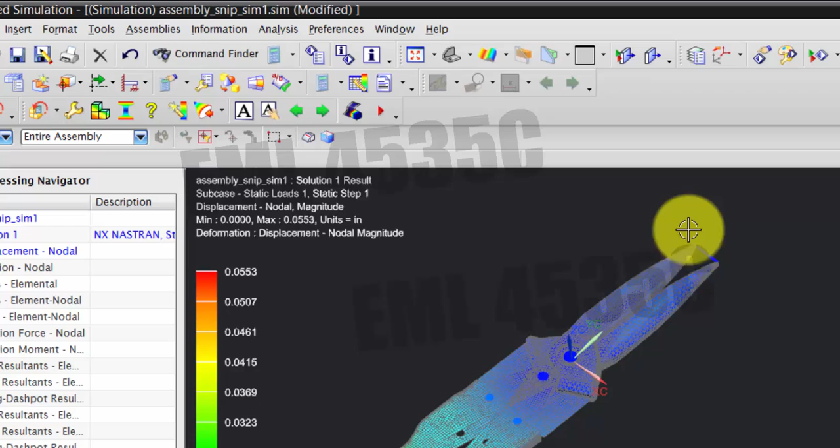Okay, so in this lab we're gonna change the material of the bar, and we're going to add a new coordinate system. That'll be lab 5 and a new coordinate system, and we're going to change the whole model into the new system as well as the bushings.

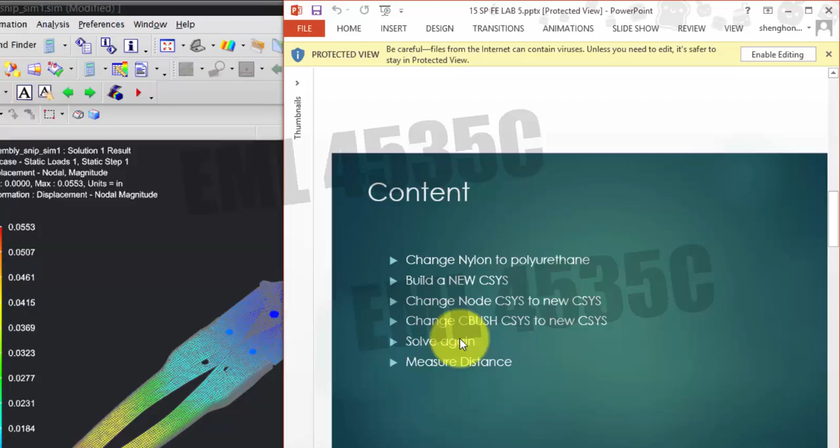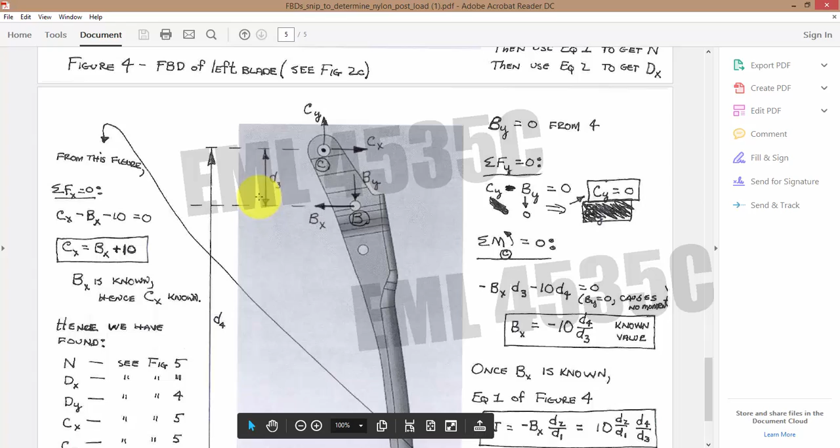Then we have to solve it again to refresh the results. Then at last we're going to show you how to measure the distance for the hand calculation, which is this. As you can see, we have 4 distances we have to measure for the hand calculation.

Alright, so let's go back to NX. I have the model from lab 4 on the screen. Then let's go to the FEM.

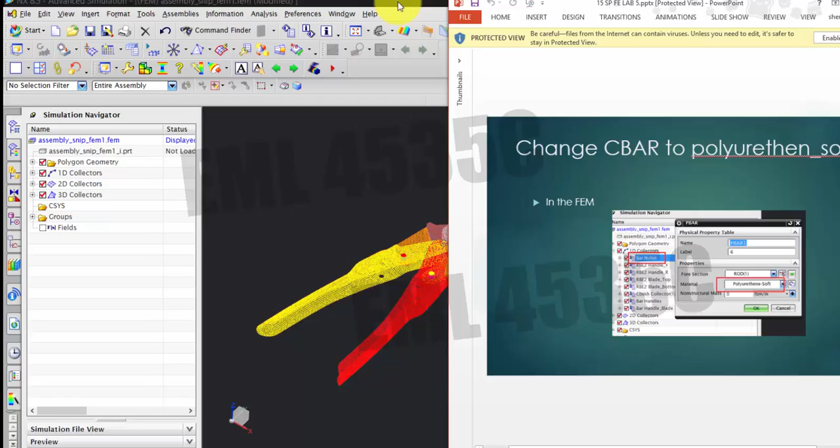So the first step is to change the material, and at this point you should be pretty familiar with that. Just find the nylon bar and double click the monkey wrench. It's not in here, so just choose from the material, and that'll be polyurethane soft.

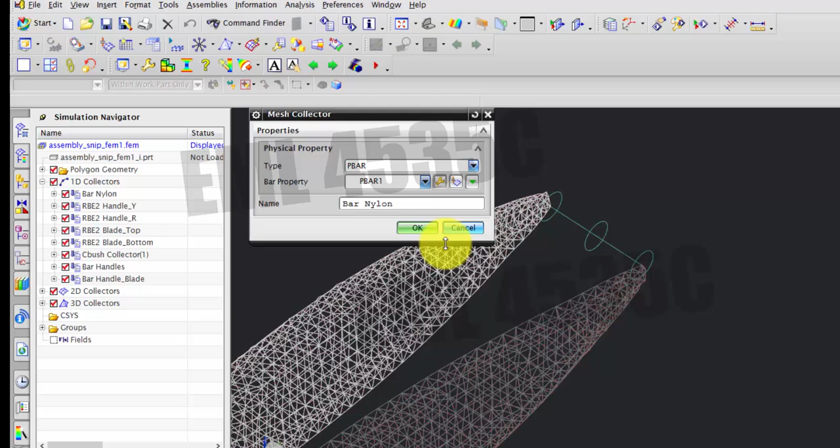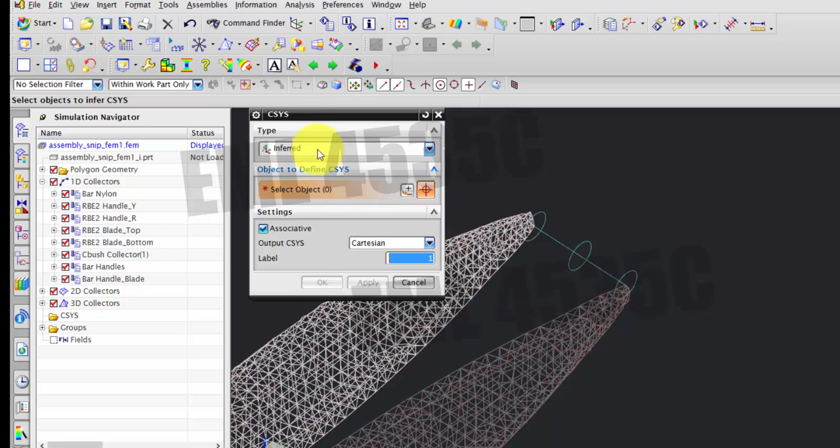Alright, next step, I'm going to change the whole model into a new coordinate system. To insert a new coordinate system, go to Insert, in Model Preparation, it's called Coordinate System. For the new coordinate system, we want the z-axis to be the same as this one. Let's see if we can turn on the old one. Z stays the same. The only thing that changes is, well, a couple of things change.

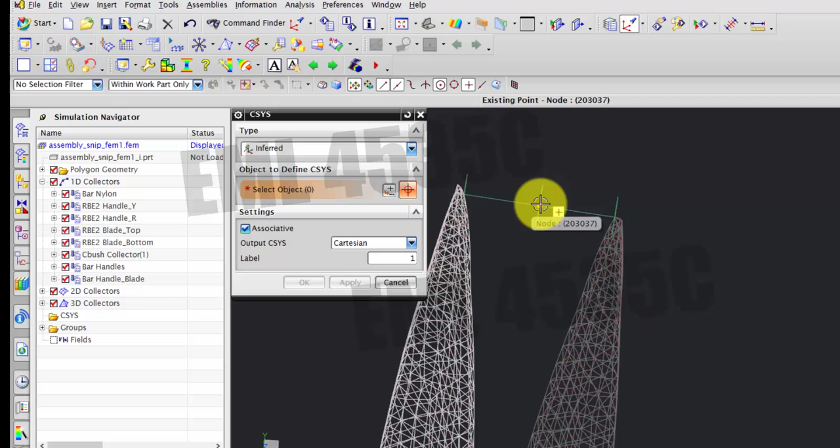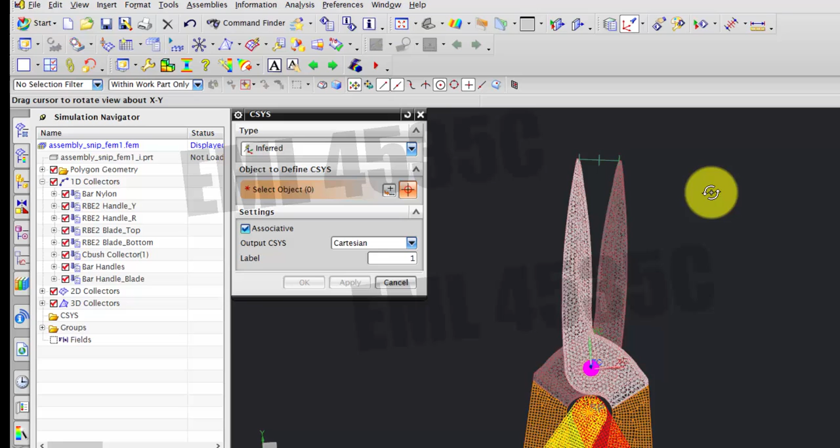The origin we'll put in here. The y-axis will be perpendicular to the C bar here. This way, the model is relatively symmetric in terms of the handle and those two pieces. The blade itself is not very symmetric. So that'll give us the x-axis along the C bar.

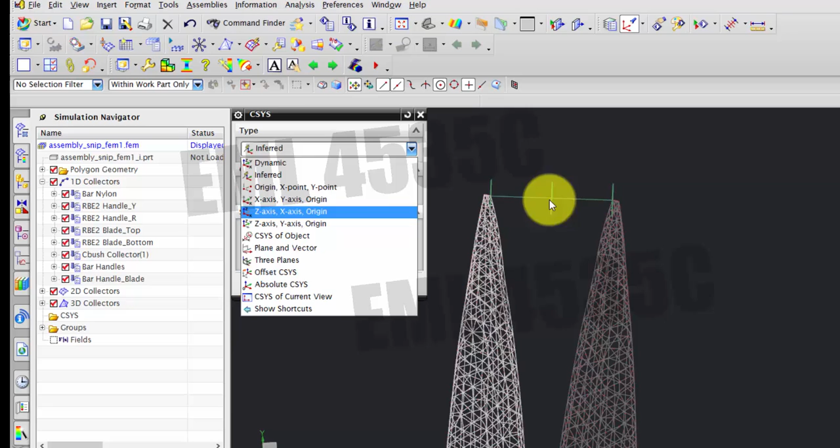Alright, so that brings us the method to insert the coordinate system. So z we know, and we know the origin as well as the x-axis. The y-axis is sort of hard to pick. So z-axis, x-axis, and origin. Alright, so the origin point is in the middle here.

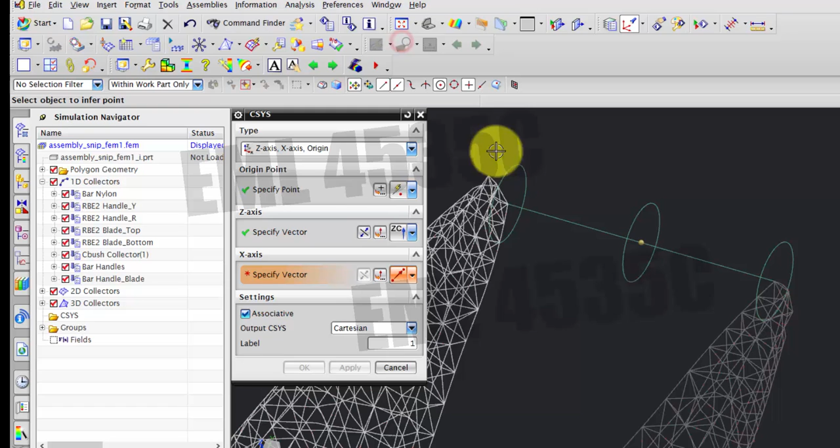Z-axis, you can either pick from this menu, or you can pick the coordinate system you just saw. And the x-axis is along the bar, so you would like to use 2 points to define the vector from this point to the end point. That'll give you a preview of the new coordinate system. This one looks good, let's just say OK.

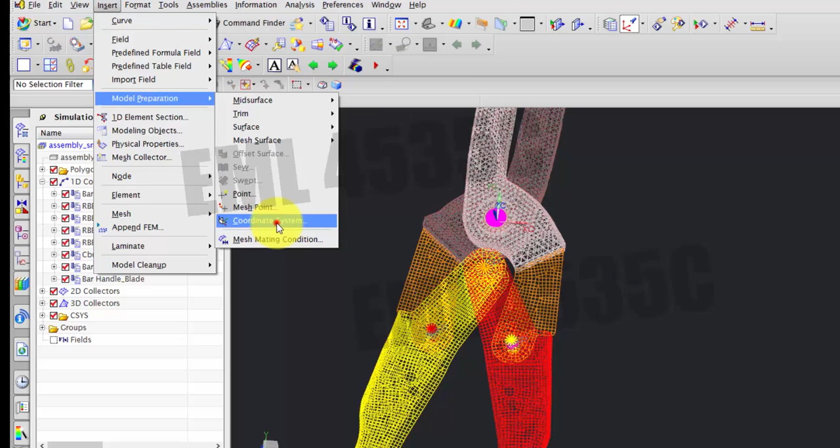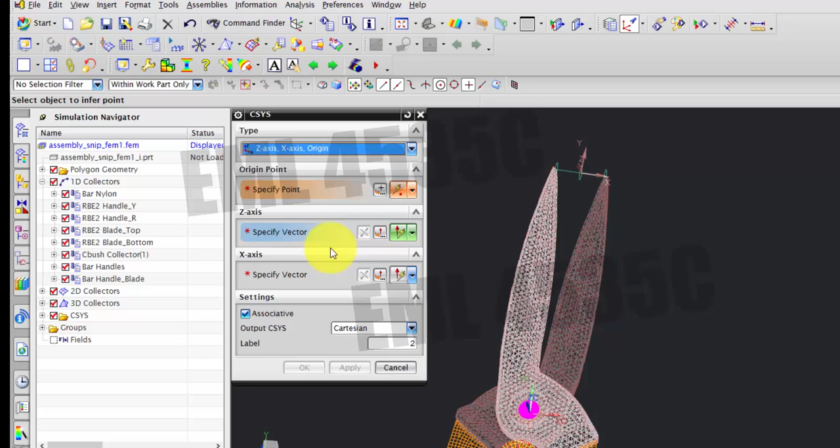Sometimes, not always, you might encounter one problem: when you insert a coordinate system with 3 objects, and as you can see, my z is already selected. If you pick a point, just doing random things, and pick another vector, because z is already selected when you open the command, you can't click OK even though you have 3 objects selected. So just beware, if you encounter this problem, just refresh it, change it so nothing is selected with 3 objects, then pick them. Let's try this, then you will have your OK button come back. Alright, that's just a little bit of troubleshooting.

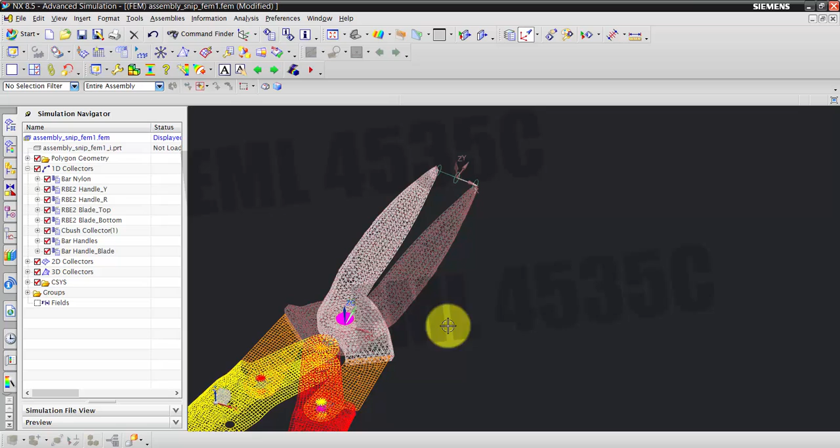Alright, so we have the new coordinate system. The next step is to change the model into the new coordinate system. And when we say change the model to a new coordinate system, we are actually changing the coordinate system for the nodes, because the whole FEM model is based on the nodes.

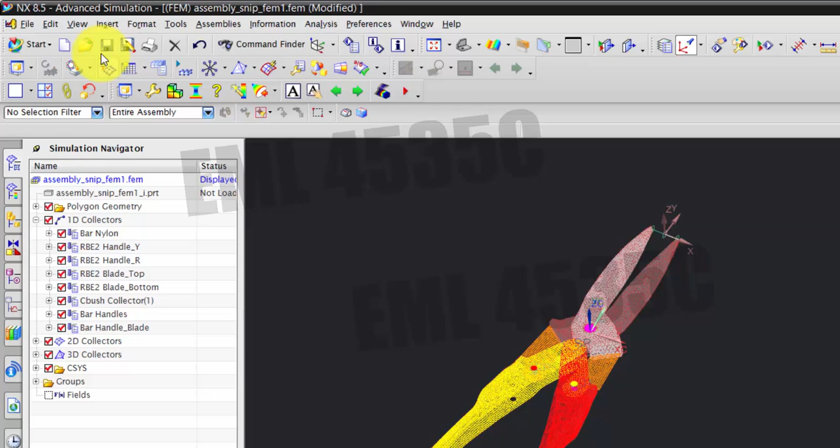So what we do here is go to Edit, and we're going to modify the coordinate system for the nodes and assign them a nodal coordinate system. The term is called displacement coordinate system, and the object is all the nodes. So before I select, I want to make sure all the nodes are on the screen by hiding and showing the meshes again.

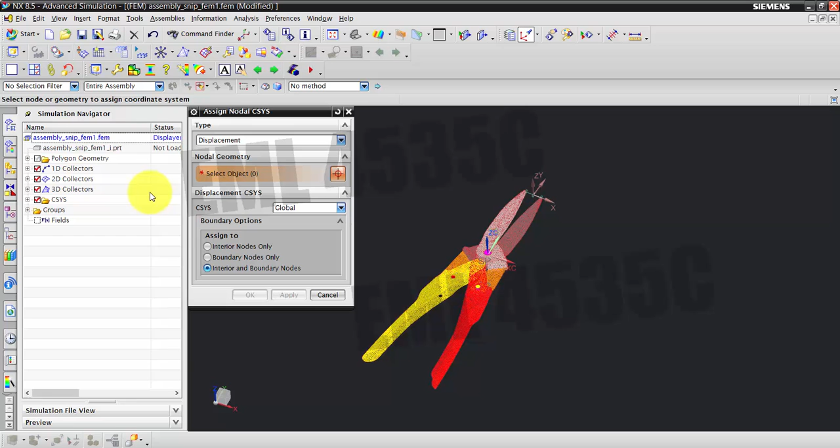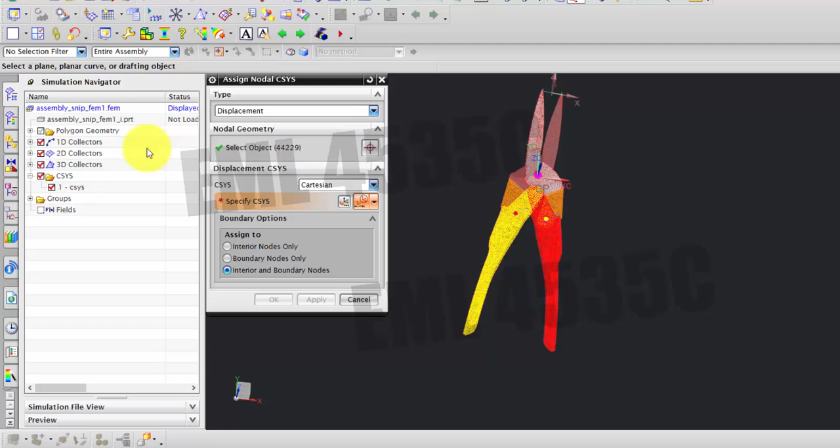This way I know all the nodes are on the screen, and this box selects everything. I should have more nodes than you because my mesh is somehow finer around the holes. And the coordinate system is not global, it's the Cartesian system we just made. If you open the folder in the navigator, you can select it from here, which is what we did in the slides. If you click, it's going to select that. Another way is you can pick it in the graphic window. Alright, so that's the coordinate system.

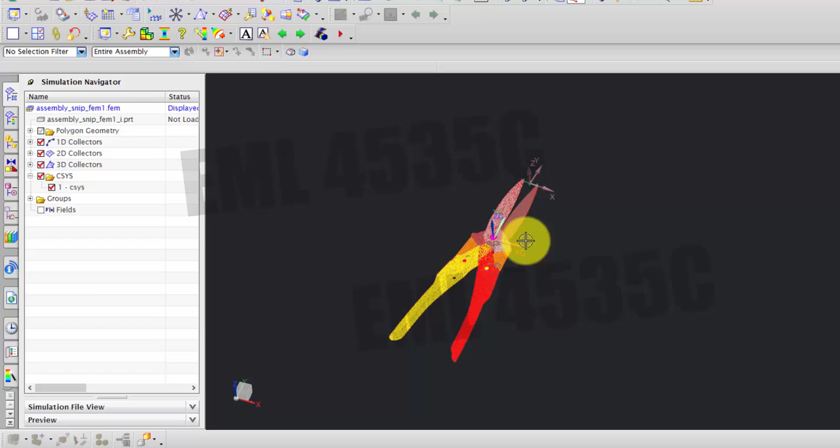Then even though nothing happened, the whole model is now on the new coordinate system, except for one thing: the C-bush. Remember we gave them a coordinate system override, which is in edit mesh associated data, and the coordinate system type was absolute.

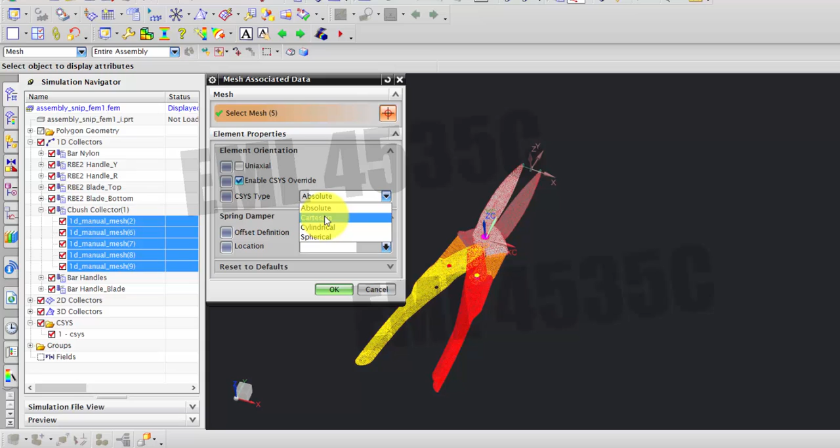Now we're going to change that to a Cartesian system, which we just created. Say okay. So the nodes and the bushings are all in the new system, and that'll be all the work you have to do in the FEM.

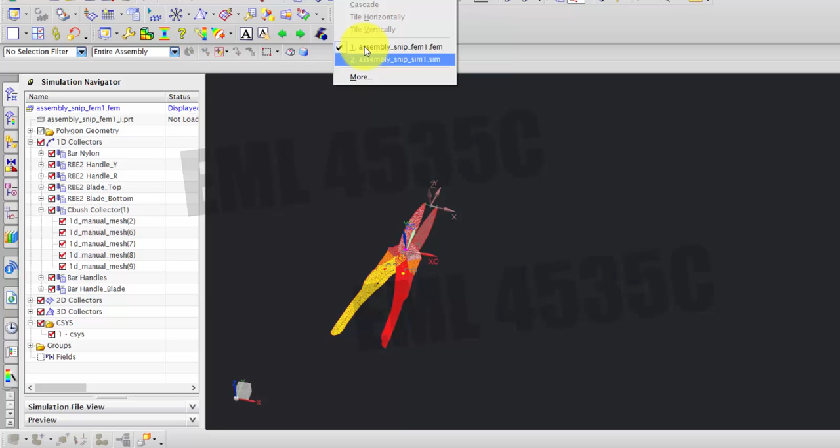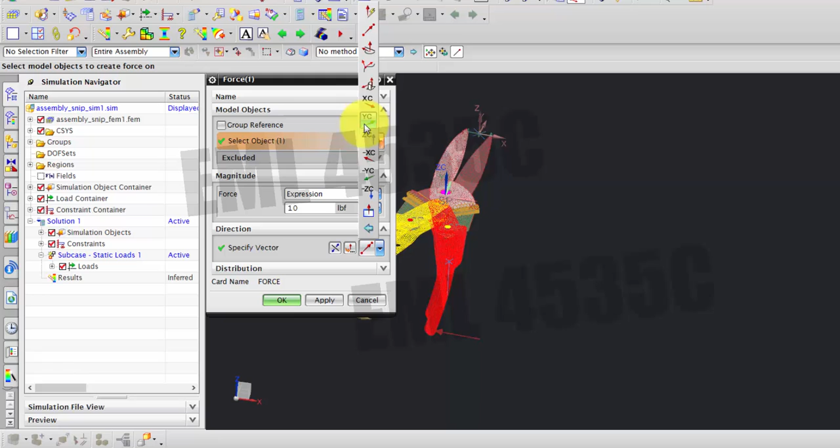The next step, just go back to the sim. We don't have to worry about the force because we define the force by 2 points, and the 2 nodes haven't changed position yet, so that's good. Just in case if your force was on those directions, X, Y, Z, you might need to change the working coordinate system, but that's not on our model.

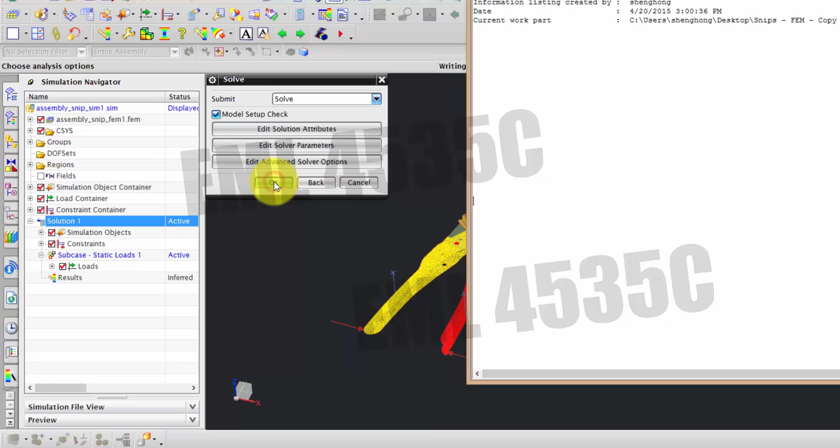So in terms of our model, you just go solve again. By the way, this button is the same as right click and solve here, okay, say okay. So it'll take a while, and after that you should get...

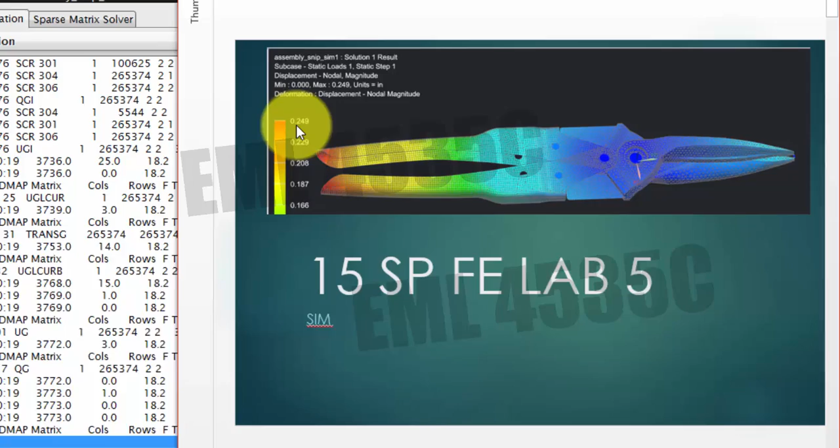The displacement of 1/4 inch, 0.249. That's the maximum displacement. And the F06, you will have very small force on the Y direction.

Take a look. All right, now it's 1/4 inch, and let's look at the F06. Go to the bottom and come up.

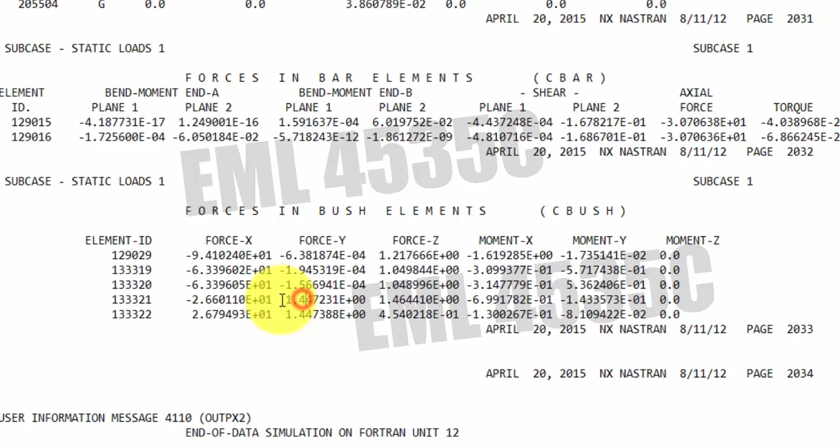So your bushing force on the Y direction, this is actually the new coordinate system. We also call that Y prime system in the class, and you will have close to 0 on the Y direction for those 3 bushings, and the bottom one, in my case, are the 2 bushings between the 2 handles. They would have some Y components.

Also if you look at the SPC force, the 2 user-defined constraints on Z direction would be much smaller than before. That is because we changed the material to a much softer material.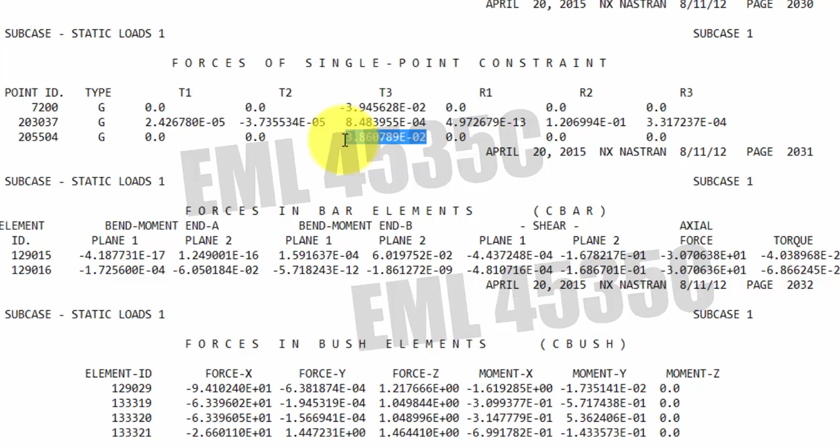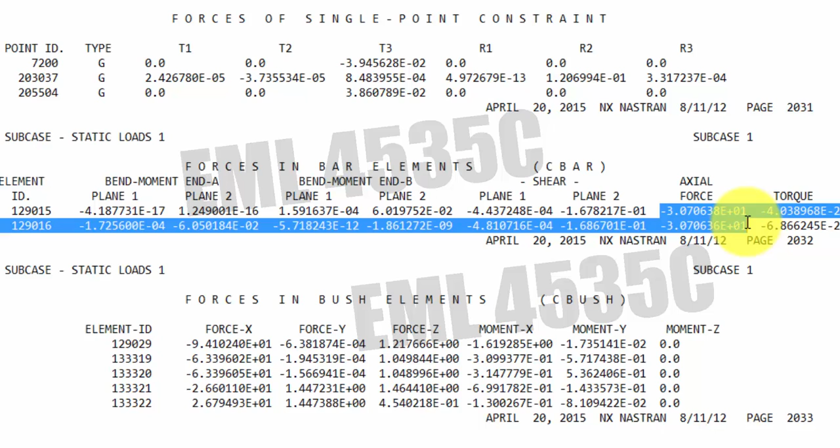Other than that, the axial force should stay the same because the force and reaction force is not determined by the Young's modulus. It's rather the distance, the geometry of your snip.

Alright, so that's the F06 and magnitude on the displacement. And lastly is the measurements.

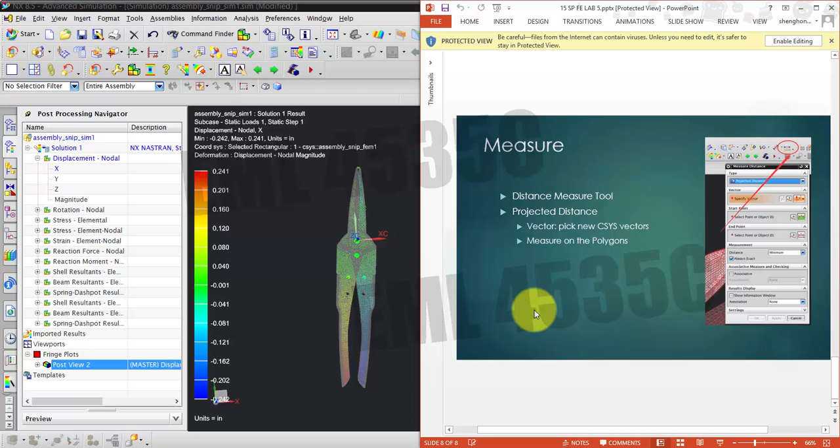Let's go to the bottom, to the measurement tool. Let's go to the FEM. Why do we need to measure things? Because in the hand calculation, we have D1, D2, D3, and D4 for the equations.

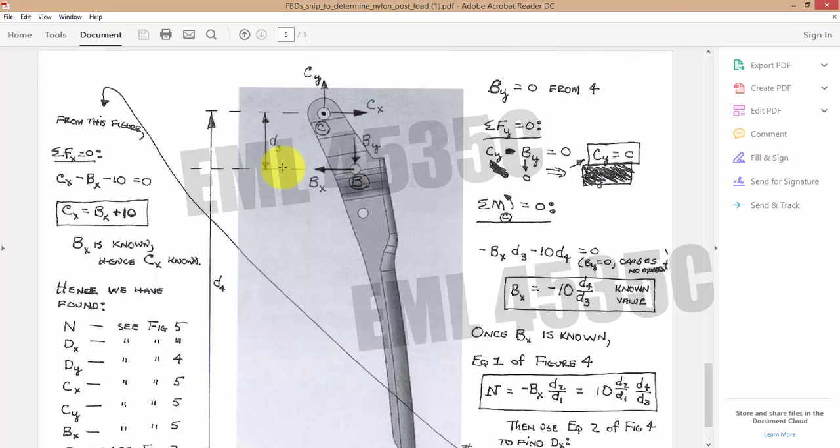Once you have those four distances, you can get all the bushing force out of the model. So you will have your analytical solution by hand calculation, and then compared to the NX solution, you should get within 5%. I'd say within 2%.

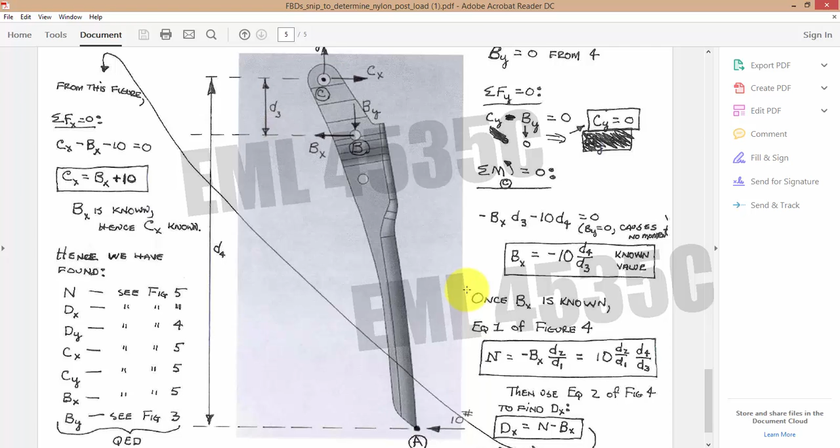Okay, all right. So how do we measure the distance? You can measure on the CAD, as Dr. Zarda did in the class. You can also measure from the FEM, using the measure distance tool.

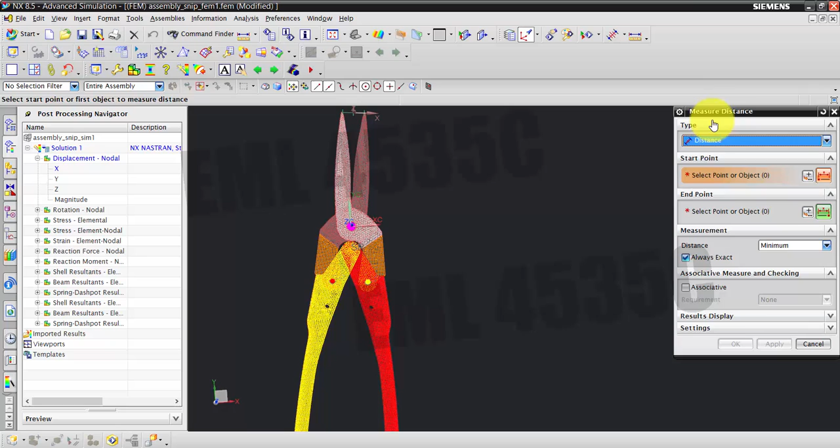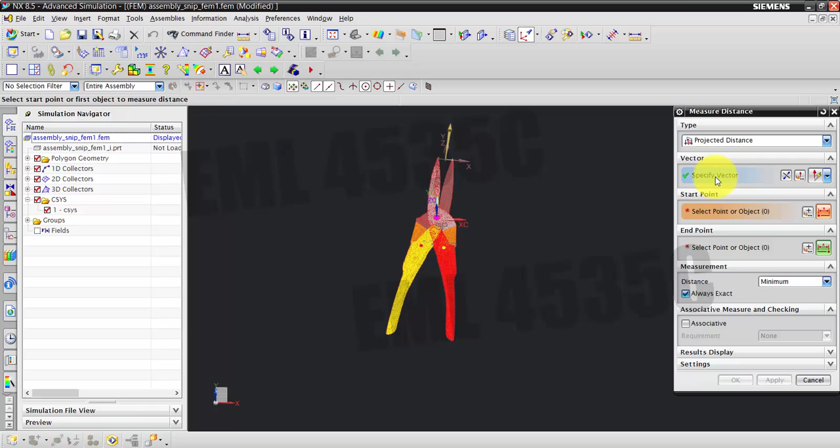You want to project on a vector, so the vector is the y prime direction. I think some people click on the coordinate system, but that's a system with 3 vectors. You have to define which one. So just click on the y prime direction.

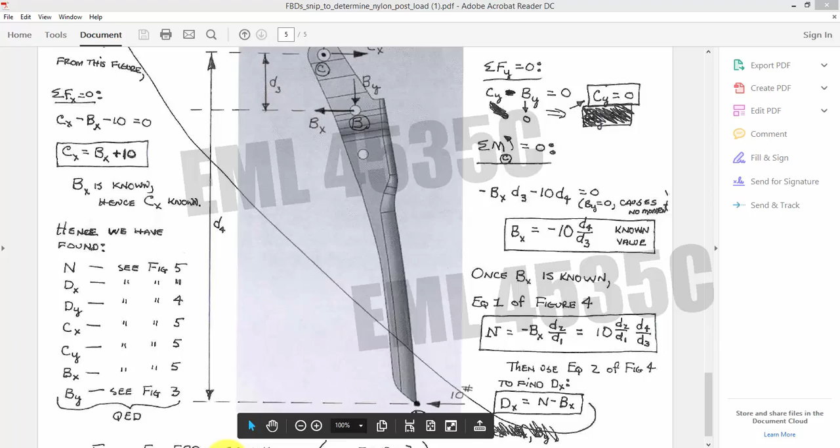The starting point, take a look from the bottom. Let's do it from the 10 pound, then you get force right away. So from the bottom point to this point between the handles. The bottom point is here. If you can't tell which one is which, you can hide a half, then that's the bottom point.

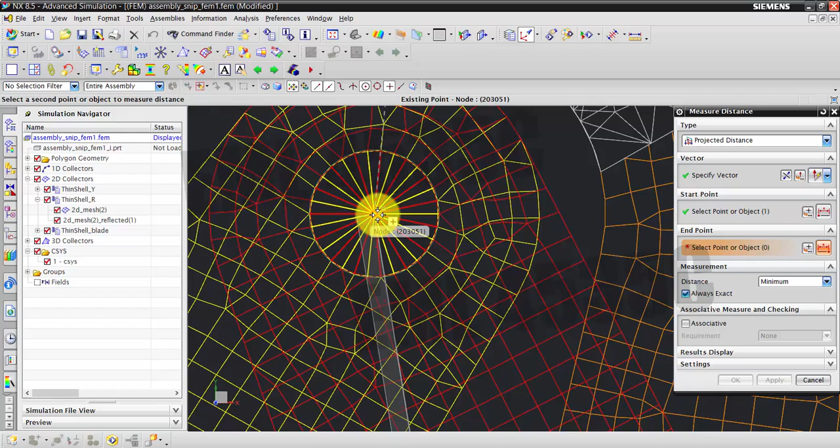Then F8. This point doesn't matter which one, top or bottom, because it's projected on the y prime distance vector. So that is your D4 and D3.

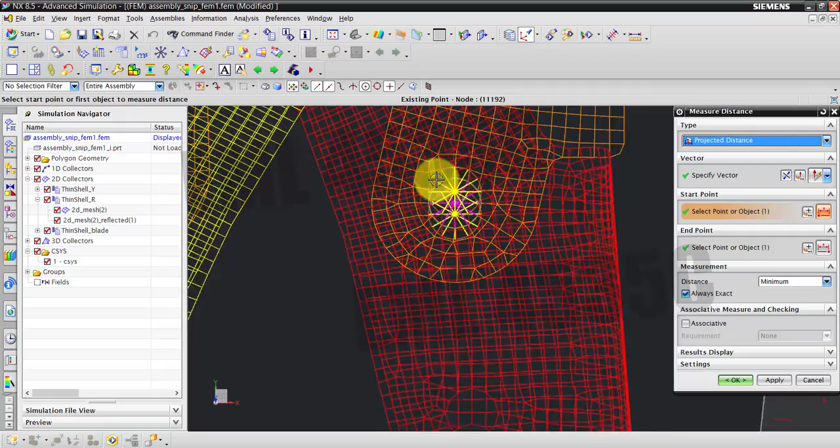So this is the second point, the end point. We can change the start point to this point, and that is D3. Then D2, D1, you can do that.

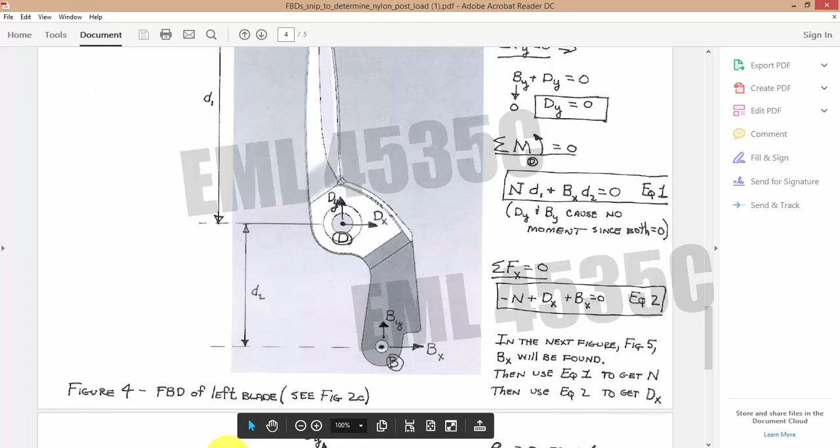It's pretty easy. Alright, so I guess that's the end of this video, and I hope you can find a really good result. Thank you.